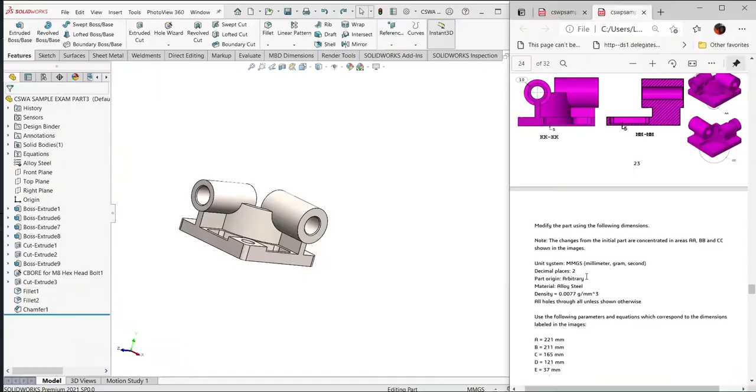Now let's continue with the CSWA sample exam practice, and this is the last part of the CSWA sample exam. We're going to make this drawing, so there's a big change here.

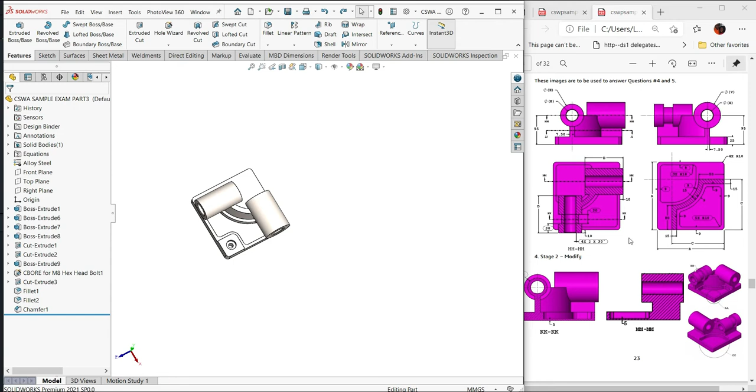We'll start with question number 4, and we'll start by deleting this counterbore and also the extrude right there. As you can see in the drawing, there's a change in the chamfer. It used to be 45, now it's 30, and also this cut in one of the cylinders.

Let's now do this drawing. We'll start by suppressing this counterbore. Come here and click suppress. Then I will also suppress this extrude. Come here, click suppress. Once I click suppress, it will disappear and give this error. Don't worry about the error, let's now fix it.

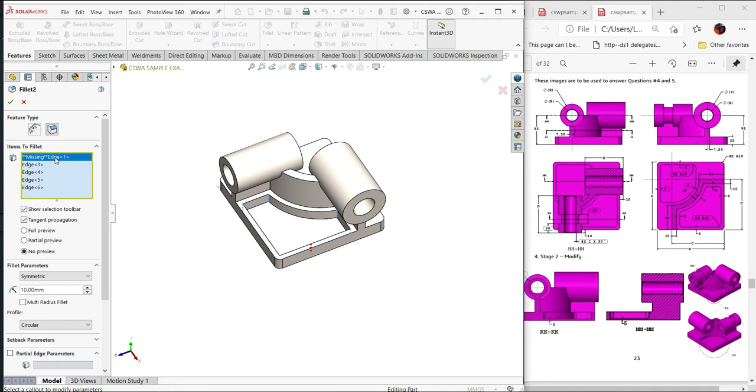I will go to the fillets because the error is in the fillets. I used to have 6, now I only have 5. Come here, edit fillets, and I will delete all these missing edges. Just delete all the missing edges. Now I need to add one more because there are 5, as you can see in the drawing. Come here, click this edge, and it is done. So we have 5 edges, which is good.

Now let's work on this cylinder and make that cut. For that, I will go to the rollback at this extrude. Now we need to make the size, and you have two ways to do that. The first one is by making a plane.

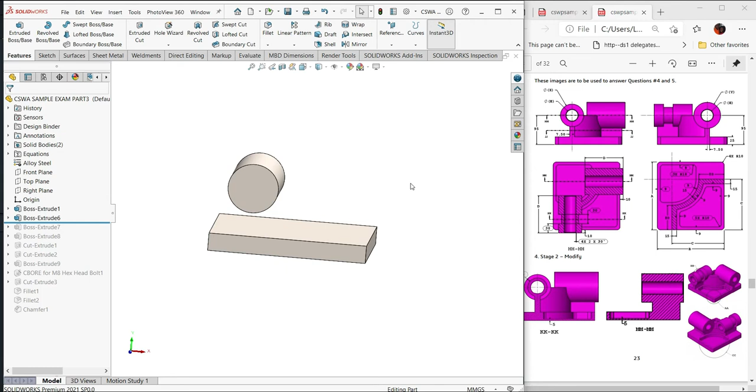Make a plane, and move this plane 30 degrees according to the drawing, as you can see there, and just convert entities and make an offset from that, then go ahead. The other way, which is the best and simplest, is to simply use the extrude cut and offset. Let's go ahead and do that.

We'll start with a sketch, then I will offset this outside circle by 10 according to the drawing, as you can see here. So we have 10, and then reverse position. Now it is done. Now let's go to the features.

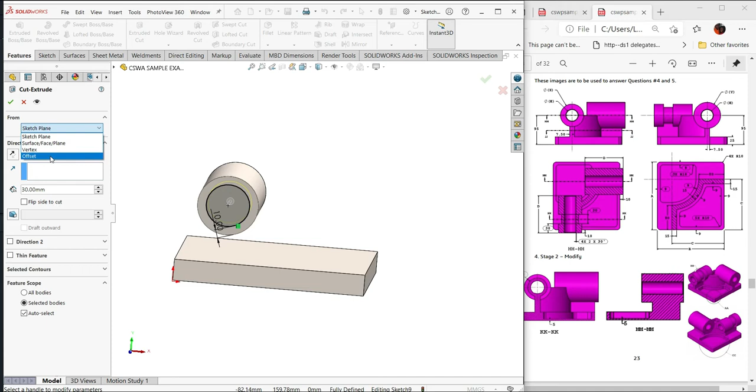In the features we're going to use the extrude cut, and make sure you use the offset. The offset here will be 30 according to the drawing. This avoids having to use the plane, and make sure of the position, and also, very important, you must use flip side to cut.

If you don't flip to cut out, the cut will be there but will not be inside. So you want to cut outside. Make sure that flip side to cut is checked. Let's see what happens if you don't check it.

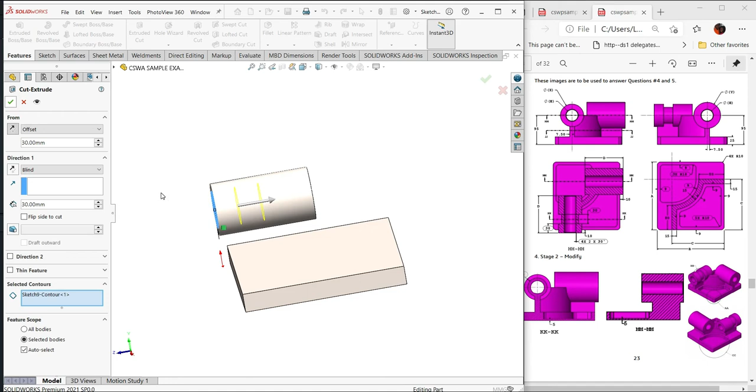If I remove the flip side to cut, let's come here and do all this. See what will happen. It will cut, but the cut will not show up. As you can see, I don't see the cut, but the cut is there. So you want to avoid that.

So let's go back and edit, then click flip side to cut, and click OK. Now flip position, make sure you have the right position, and click OK. As you can see, we have the cut because we flipped to cut outside. That's the way you should use it.

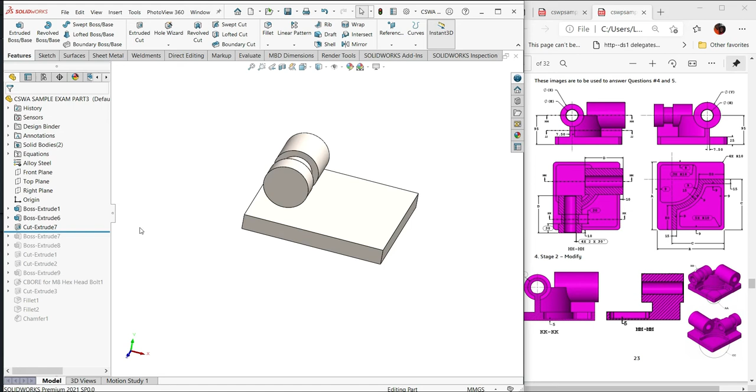Now let's go and end this rollback. For that, we just need to come here to this feature, right click, and roll to end. Then we'll go to the initial position. So we have this part complete.

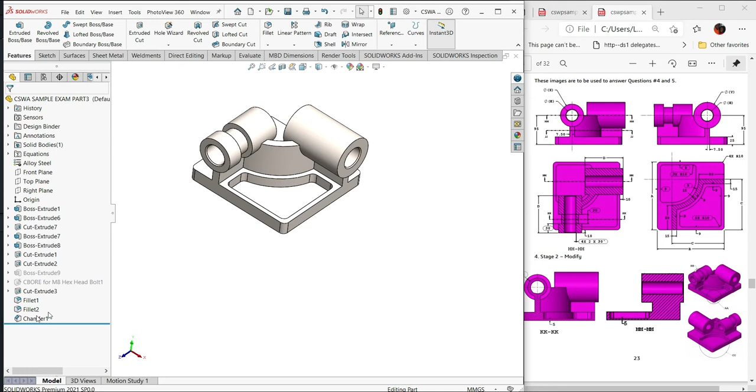Now let's work on the chamfer. The chamfer used to be 45 degrees, now it's 30 degrees. Let's work on that, we just need to go to this chamfer and change it to 30 degrees. Let's go to the chamfer edit, and the degree will be 30, not 45 anymore.

Just make the point here. Okay good, now click OK. So we have this part complete as well.

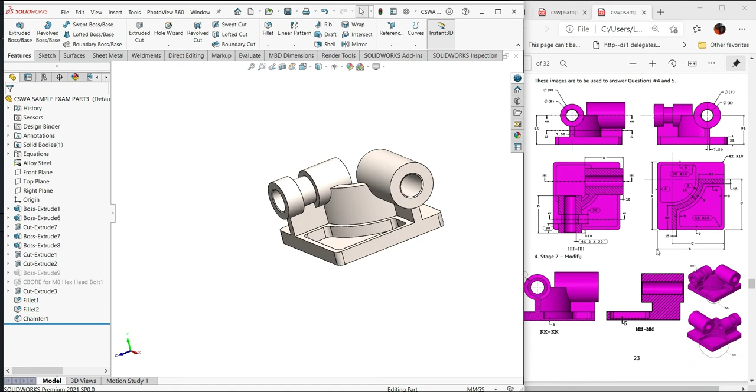Now let's make that cut on the back. We have one cut on the back, which is the last one here. So let's make this cut on the back, and also there's some chamfer or fillet. We'll come here and sketch.

Now I need to first offset the lines, some lines. We need to offset. We'll select some edges on the drawing. We'll select this edge first, then offset, and here it will be 9, reversed position. Good, now we'll also select this line here, and also reverse position.

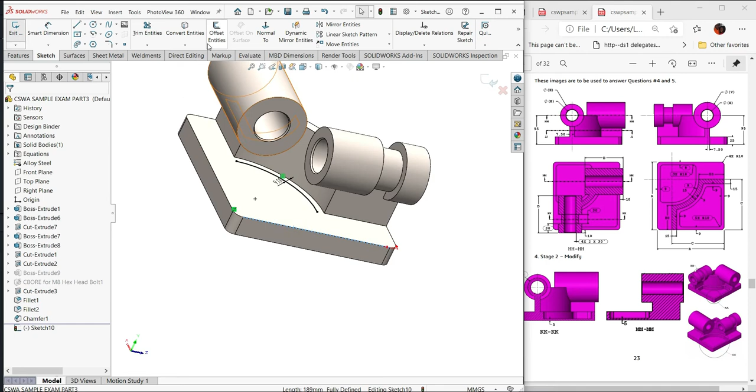I think it is the right position. Let's check, okay, that is the right position, and then click OK. We'll do the same thing from this edge here, then flip position. Okay, so this part I will just extend this line, just move it like that and like that to cross.

Now let's use the trim. We'll type here, make this line first. Click there, almost there, make the other line as well. Make sure that they are vertical and horizontal, so a straight line.

Now let's use the trim. I'll use S and then go to the trim, power trim, and cut all the unwanted lines. They are all unwanted lines.

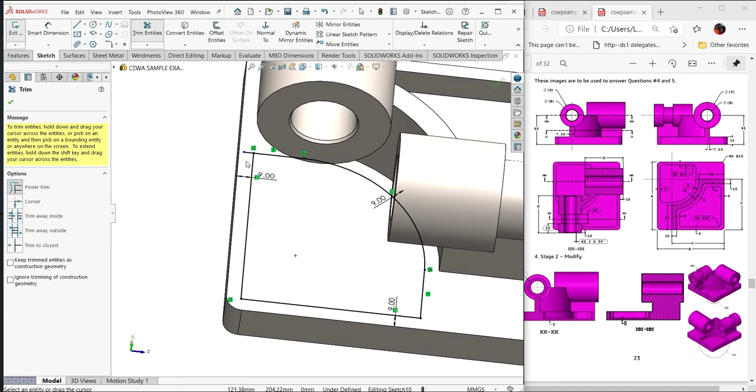Okay, like that, and as well in this position like that. So we have this cut all here.

So what is the size for the cut? We have that here as well, right? So it is 5 from the surface.

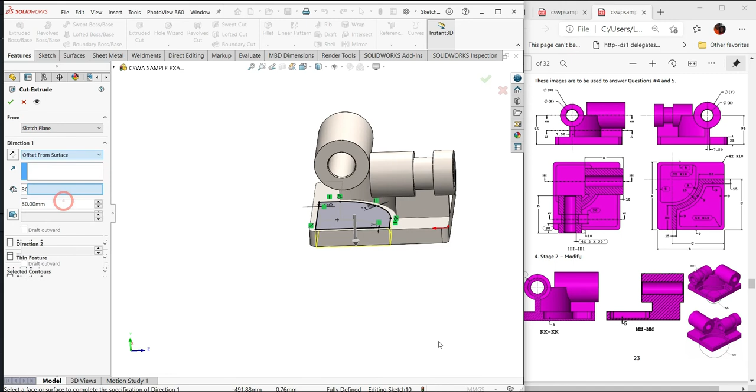I will go back to the features, extrude the cut, and use offset from the surface, go back and select this surface, put 5, and click OK. So this cut is well done.

Now the last thing that is missing is the fillets. There are 3 fillets of 10. Let's go ahead and do all this fillet right there.

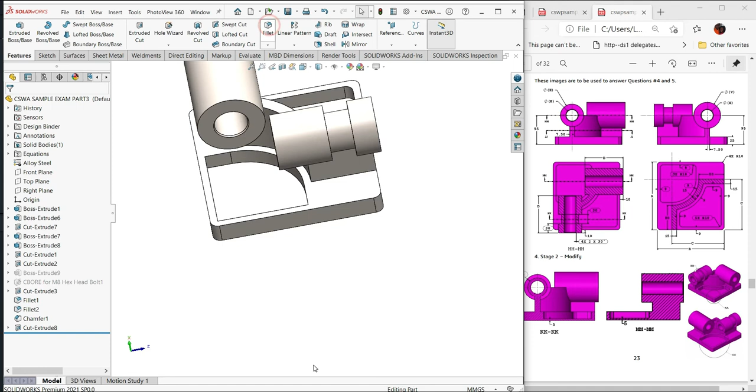Let's go to the fillet and select one of the edges, then come here to this automatic, and we'll select automatically all 3. So we have 3 edges, and click OK. So 10, ready 10, then click OK. So this part is complete.

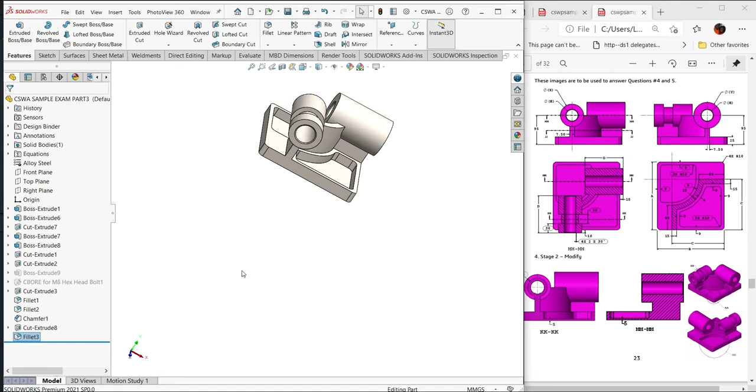Now let's continue to answer the question. Number 4, make sure that you save, because here we are in the part, question number 4. Just put here 4A, save.

Good. Now I need to rebuild to reflect the changes in my drawing. So it is also done.

Now let's continue to answer the question. So the density is the same, material as well is the same. We need here to change the parameter.

So from global variable A to E, and there is also a note that the Y changes. So we need to pay attention to that, the Y is also changed.

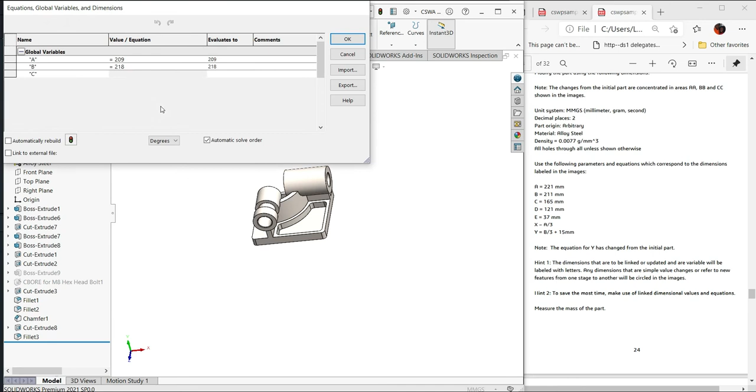So come here to equation, manage equation, and start changing all of them. A will be 221.

B will be 211, and C will be 165, and we have as well D 121 and E 37, and X will be the same, no change.

And here Y will be plus 15, so that's the change there, plus 15, and we have here all the changes.

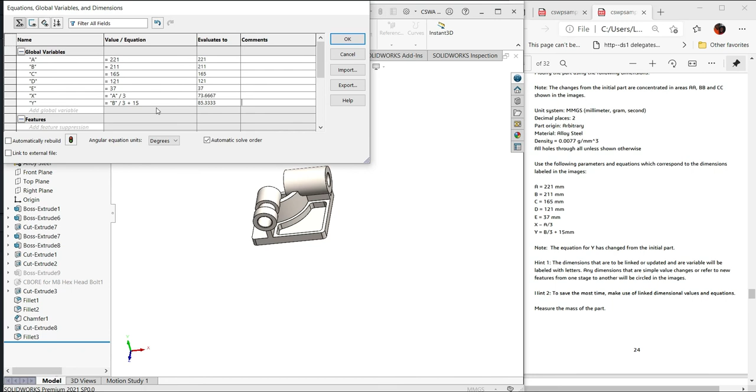So this part here is complete. Now we need to click OK, and as well save, rebuild as well, very important here to reflect the changes.

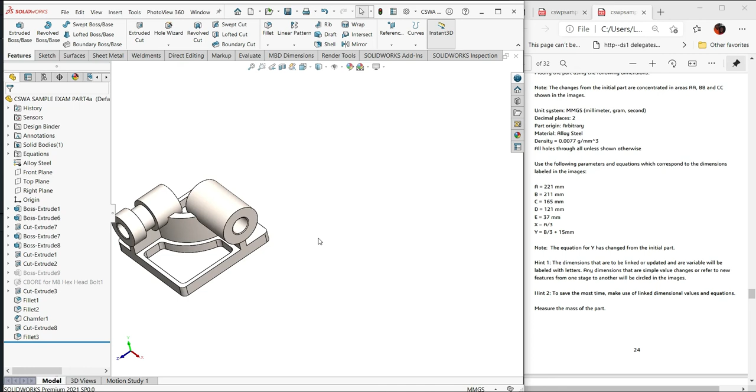And now we need to measure the mass of the part, and compare with the answer key. So what is the mass of the part? Let's see real view, just like that.

Okay, good. Let's go ahead and go to the evaluate mass properties. So here we have this one here, okay, 13206.38. So now let's go ahead.

The answer here is B, right? So there is a slight difference of 2, which is okay, because you should have the answer 99% to 100, not below 99%. So as you can see here, we have the right answer, which is good.

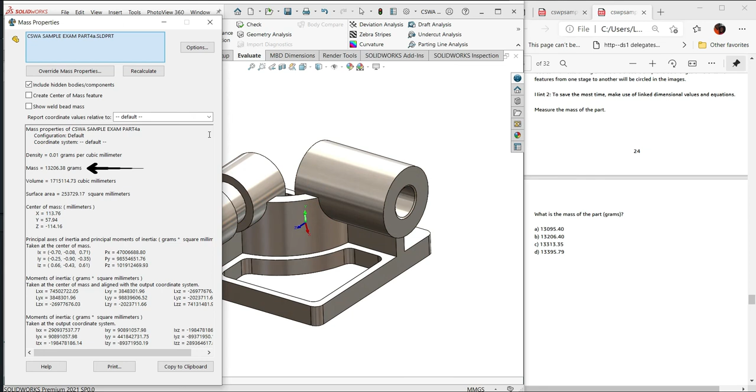Which is according to the answer key, question 4, it is also B, so which is right. So you can miss a little bit here, but between 99%, so you can fail just 1%, not more than that. So we are within the range, so it is good.

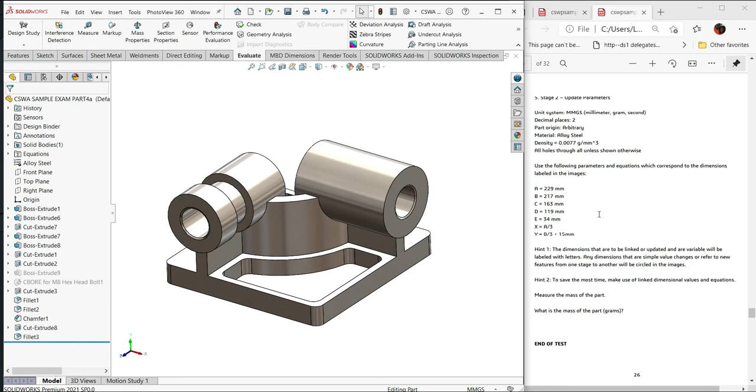Now let's go ahead and answer question number 5. They simply ask to update the parameter, so global variable from A to E.

Let's go ahead and change all these according to question number 5. So we'll first manage the equation, and then we need to change A, B. So A will be 229, B will be 217, C will be 163, D will be 119.

E will be 34, and X will be the same, and Y as well is the same. So we'll reflect according to the A and the B. Now click OK.

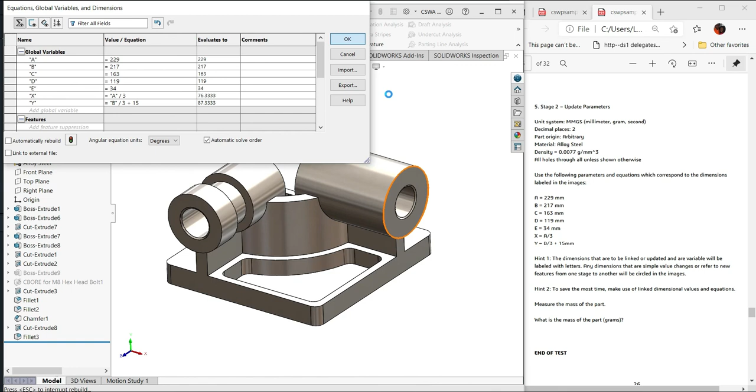And here we need to save as, so this is part 5, we'll put 5a, okay, save. Then I will as well rebuild to reflect the changes.

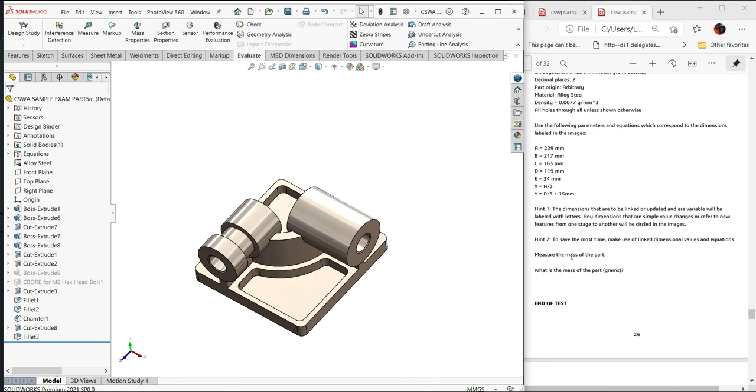Now let's evaluate what is the mass of the part, and let's see if you have the right answer according to the answer key. So what is the mass of the part? Evaluate mass properties, rebuild first again, mass properties. As you can see, we have this answer, right?

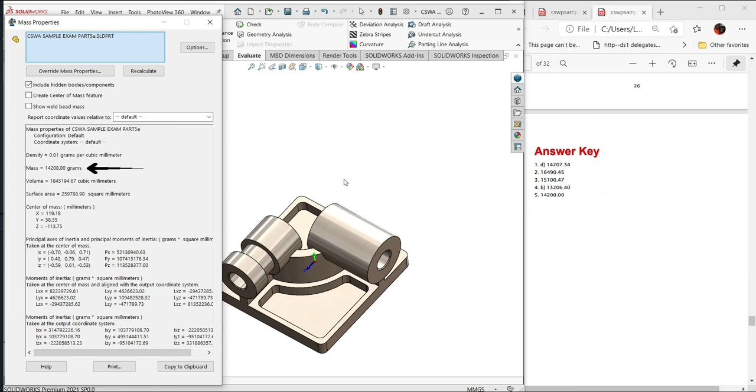Let's check if you have the right answer according to the answer key. So as you can see, we have the same answer, 14,208.00. So that's the answer for question number 5, and we complete this part.